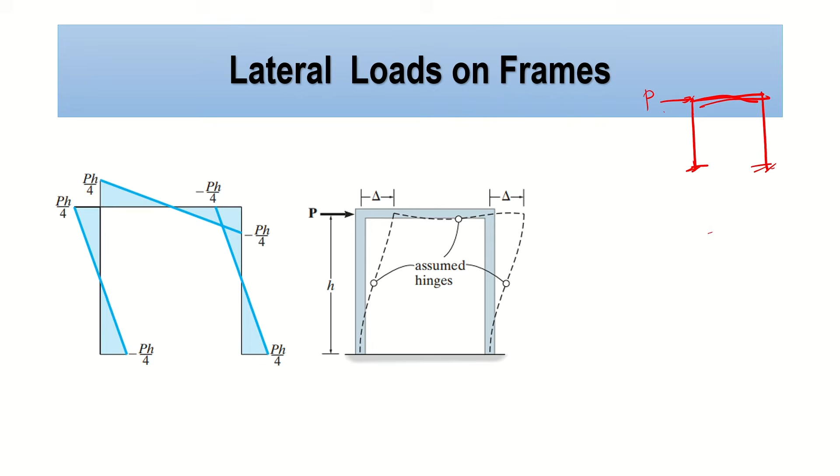So what do we do with that? This is an opportunity for us to create a modification in order to make this statically determinate. What we'll do is place internal hinges. When we place internal hinges, we all know that there is no moment occurring there. But we do have two forces, horizontal and vertical.

Now, because we have two forces, we can say that this is the appearance of my framing system. Now, at one joint, we still have four unknowns. So what are these four unknowns?

Let's say, for example, we consider this joint. Our four unknowns are 1, 2, 3, and 4. As you can see, this is still statically indeterminate because we can only provide 3 equations of equilibrium.

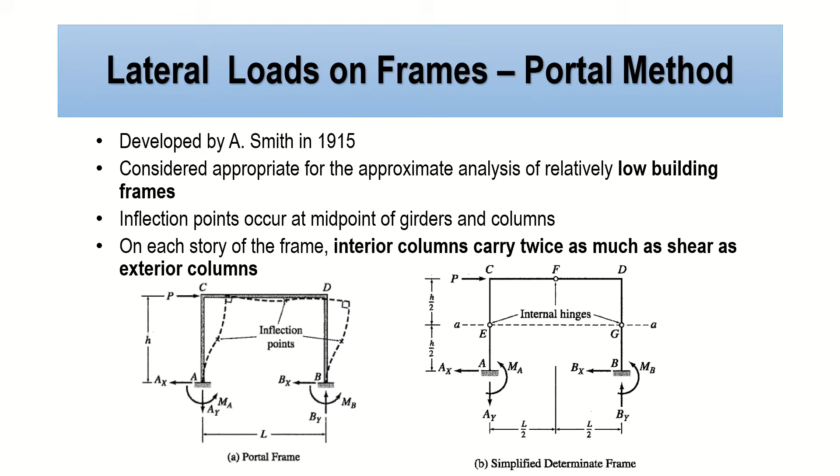To better understand concept number 4, I made an analysis here. So we have the portal method. Let's consider this framing system presented on your screen. As you can see, it looks like two portals.

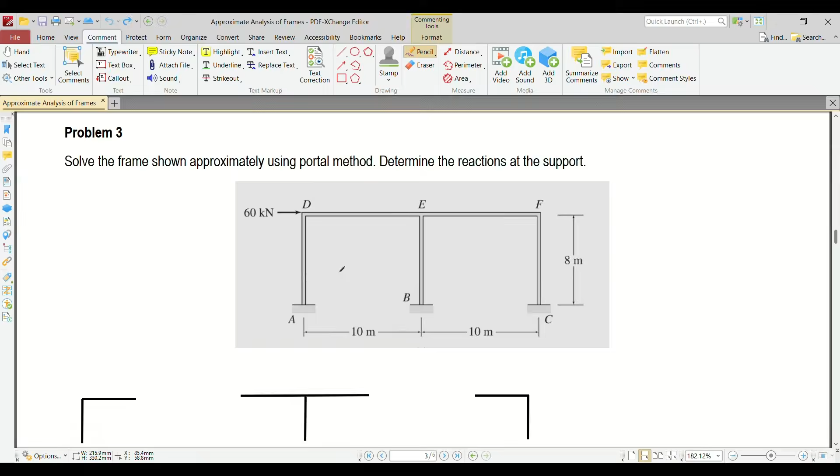As stated in the concept I presented earlier, at the center of each column and each girder we should provide internal hinges because that is a point of inflection. So now we'll place internal hinges here, here, here, here. To make it easier, it's good to label them - we finished at F, D, E, F, G, so this is G, H, I, then J, and then K.

Okay, so now the next step here is to get the value of the shear. Because, as we said earlier, based on the concept of approximate analysis due to horizontal loads - the portal method - the interior columns carry twice as much shear as the exterior column. So that's what we'll do. Let me draw the upper part first.

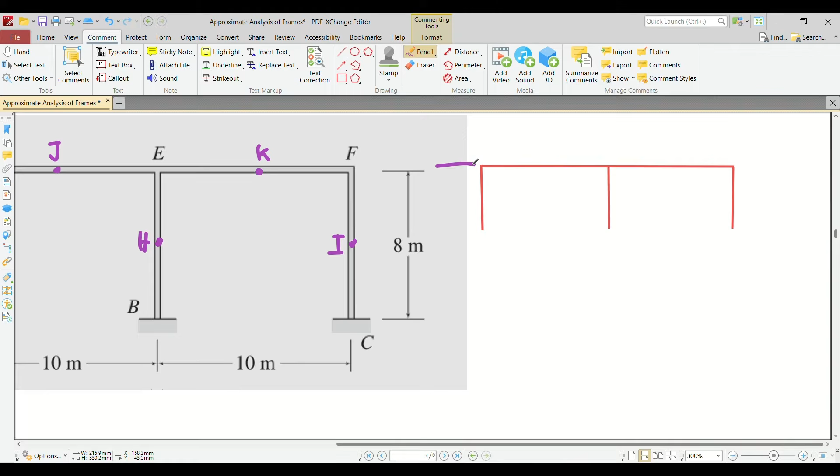So ito yung upper part class, no? So of course that is subjected to a loading. So ano yung loading natin? 60 kN. So ito pala ay 60 kN. So ngayon magkakaroon tayo dito, exterior V lang yan. Interior 2V. And then exterior again, this is V. In order to get the value of V, edi summation forces horizontal. So summation forces horizontal equal 0, papunta sa right, positive.

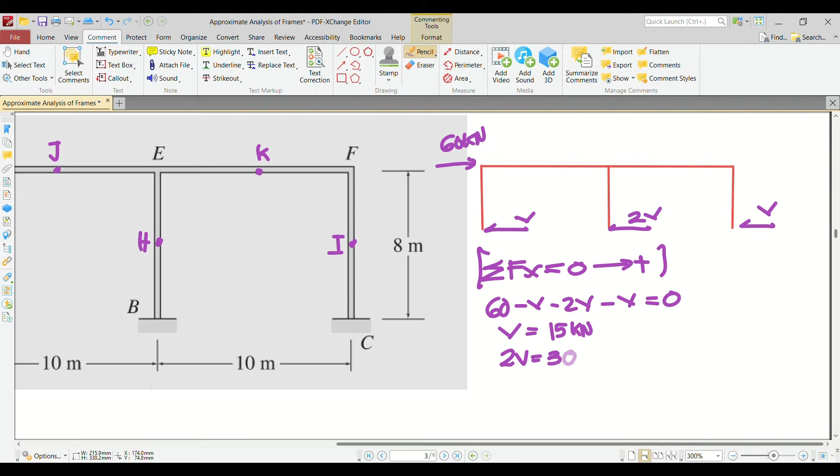So therefore, what will happen? So we have 60 positive papunta sa right minus V minus 2V minus V equals 0. So your V here is 60 divided by 4, so ang nakukuha ko ay 15 kN. So ngayon kung 15 yan, yung 2V natin is equivalent to 30 kN.

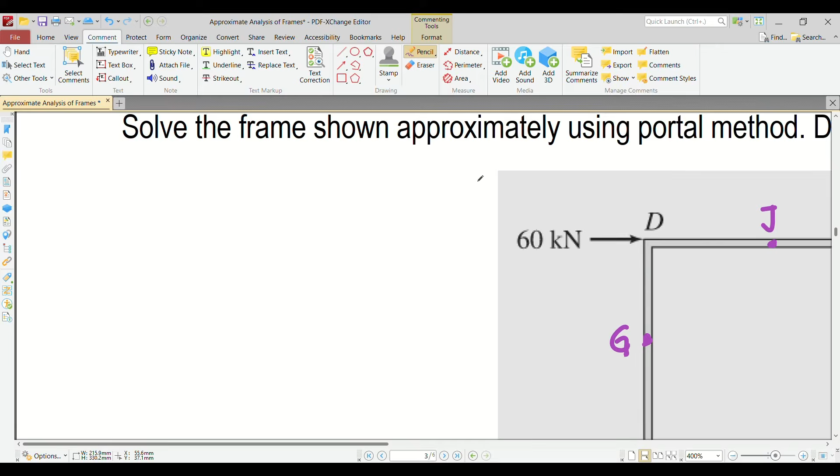Okay? So let's try to incorporate that here. Siguro lagyan na natin ng letter dito. Since pinapasolve sa atin yung framing system, lagyan natin to. So ito I think is G. GDJ. So this is G. This is D. And this is J. And then we have here the single shear na tinatawag nating V.

Or pwede na nating ilagay na 15 kN, no? Ayusin ko lang. Siguro ilagyan natin ng arrow. Ito na lang natin. Okay? So that is 15 kN. So don't forget you have here 60, no? So sige, lagyan din natin ng arrow dyan. Okay, so this is 60.

So ang gagawin natin, madali lang, no? Just remember that each joint should maintain equilibrium. So ibig sabihin, kapag nag-summation forces horizontal ako, vertical and moment dapat maging 0. So ngayon, ang gagawin natin, since hindi siya 0 pa, no? Kasi may 60 ka dito, may 15 ka dito, kulang ka pa ng 45. So ngayon, ano yung magpa-45 dyan? Remember, this is the hinge, no? Hinge din ito. Ito, hindi na ito makakapag-provide ng horizontal kasi meron ka ng 15. So magkakaroon ka ngayon ng

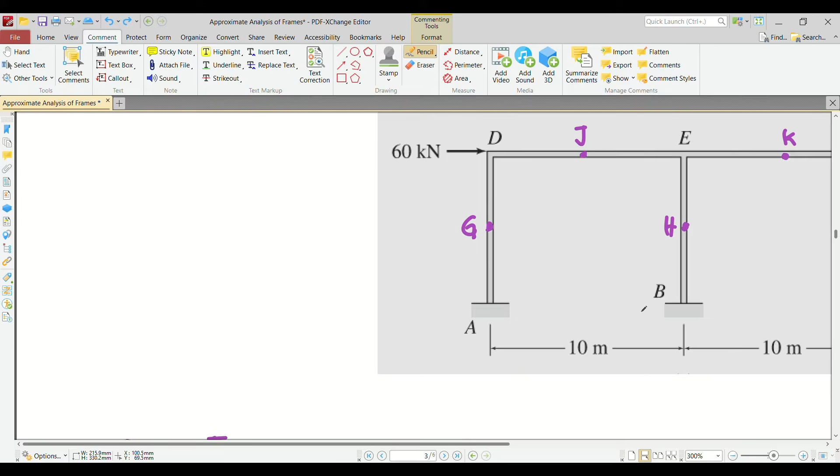Kasi wala kang horizontal. Again, like I said, each joint should maintain equilibrium, whether it is moment, or horizontal, or vertical summation. So ngayon, ang gagawin natin, gamitan natin ng moment. So dahil sa 15 kN, meron ka ngayong dito. By the way, what is this distance? Lagyan natin ng distance. So, ito ay, I think this is 8 meters. So 8 meters, kalahati ng 8 is 4, kalahati ng 10 is 5. So ito ay 4 meters.

This is, siguro lagyan natin ng block. This is 4 meters. This is 5 meters. So, ang gagawin natin, solvein natin yung mga moment niya. So, paano yun? Eto. Okay? So, 15, dahil dito sa 15, magkakaroon ka ng clockwise moment. Ngayon, anong value niyan? Eh, di 15 times 4. So, this is 60 kN meter.

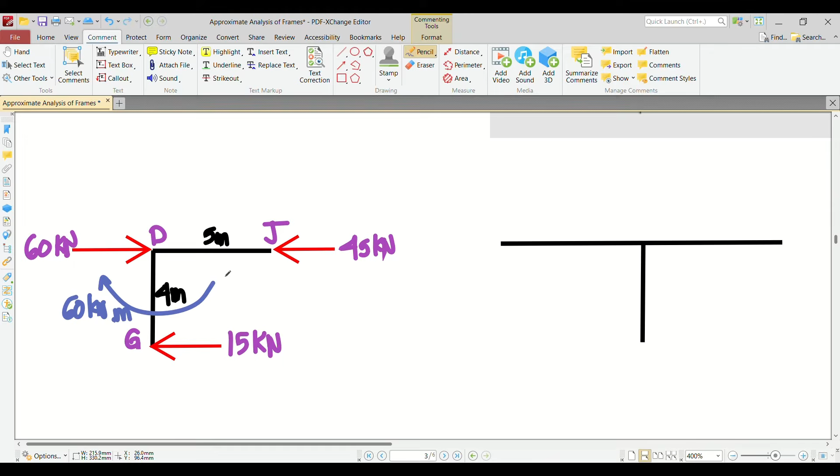So, of course, we need to counteract this moment. Paano? Eh, di pa ganito, pa-counterclockwise na moment. So, dapat yan din ay 60 kilonewton meter to maintain equilibrium.

So, ano mangyayari after that? So, of course, merong nag-i-induce dyan na 60. Hindi naman magkakaroon ng 60 dyan dahil lang dito. May nag-i-induce dyan. Ano? E di ito. Vertical force dito. So, ano yung vertical force dyan? So, that is just 60 divide 5. So, ilan yun? I think that is 12.5. 60 divide 5, that is 12. So, ilagay natin dito, 12.

Baguhin ko lang yung pen ko, ha. This is 12 kilonewton. And then, after that, we can now take summation forces horizontal. Kung meron kang pataas na 12 dito, malamang ito ay pababa, na 12 din, of course. To maintain equilibrium. Okay? Ito rin ay 12 kilonewton.

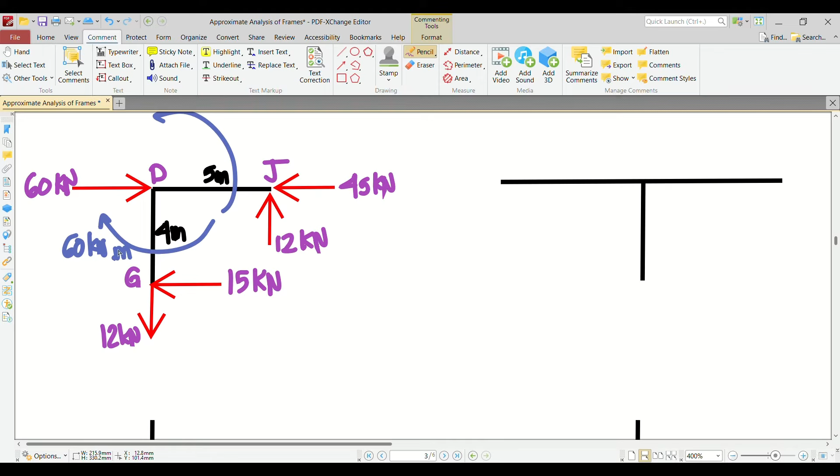Hopefully, nakasunod, ha. Again, itong 60 ay galing lang sa 15 times 4, nag-moment ka dito sa D. 15 times 4, 60. Ito, mas counteract para maging equilibrium. So, dapat may counterclockwise ka na 60. May nag-i-induce dito, which is yung 12. 12 times 5 is equals to 60. So, tapos na natin tong joint na to.

Okay? So, ngayon, punta tayo sa next joint. So, lahat ng forces dito, for example, ito, papunta sa left, tapos papunta sa taas, magbabaliktad yan kapag tinransfer mo. Okay? So, ito, papunta na sa right, and then, papunta na downward yung force, vertical force. Okay? So, ito ay 45 din. Tapos, ito ay 12 kilonewton din. Same lang naman yan, internal hinges yan.

Okay? So, siguro lagyan natin ng horizontal, ng distances. So, ito ay 5 meters. This is also 5 meters. And this one is 4 meters. So, this is J.

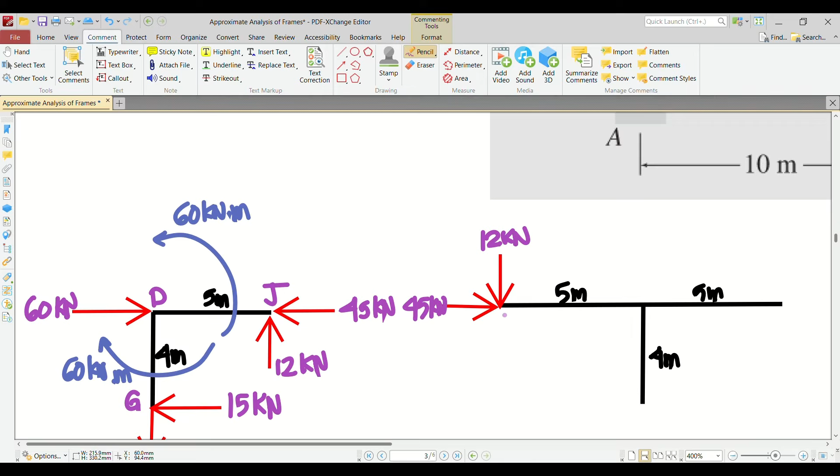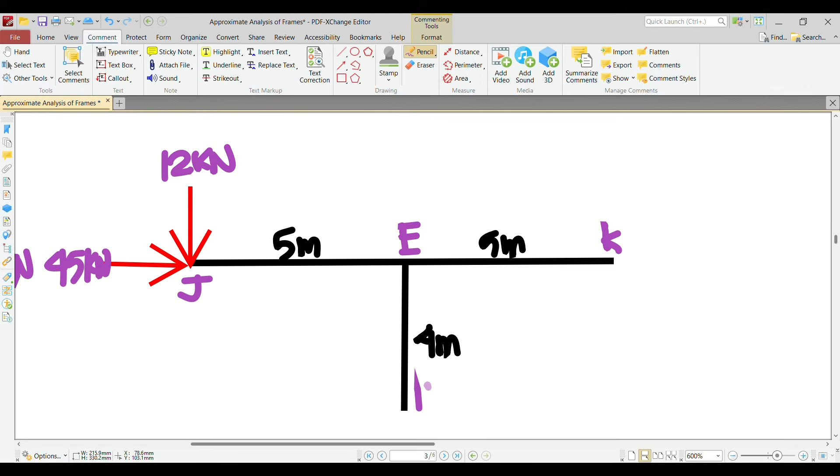J, and then ano pang letter yan? E, K, H. Okay? So ngayon, anong next step na gagawin natin?

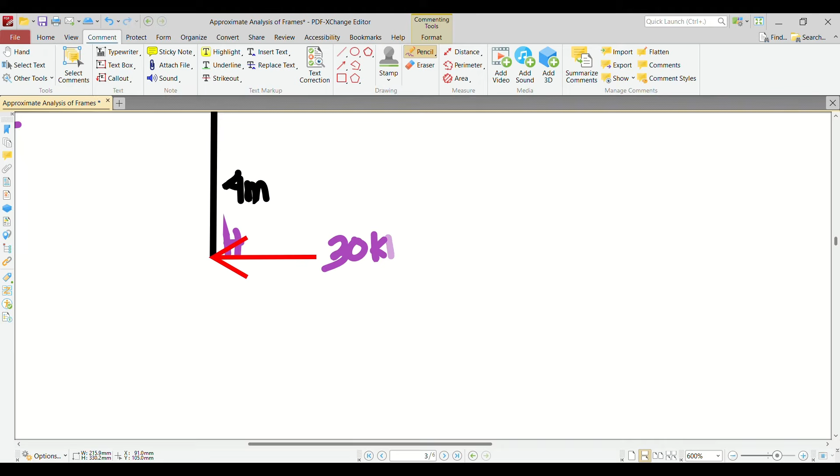Remember that we do have here a shear, 2V, di ba? May 2V tayo dito. E di ilagay natin, ano ba yung 2V natin? Kung ang V natin ay 15, ang 2V natin ay 30. So ito ay 30 kilonewton.

Okay? So of course, we do have here, kung 45 to, ito 30. So to maintain equilibrium, kailangan may pupunta pa ako sa left side na ilan? So that is 45 minus 30. So probably this is 15.

So 12 times 5, that is 60 kilonewton meter. Aside from that, may moment din tayo dito, ini-induce na 30. So pag ganito, anong value niyan? That is 30 times 4. So 30 times 4 is equals to 120 kilonewton meter.

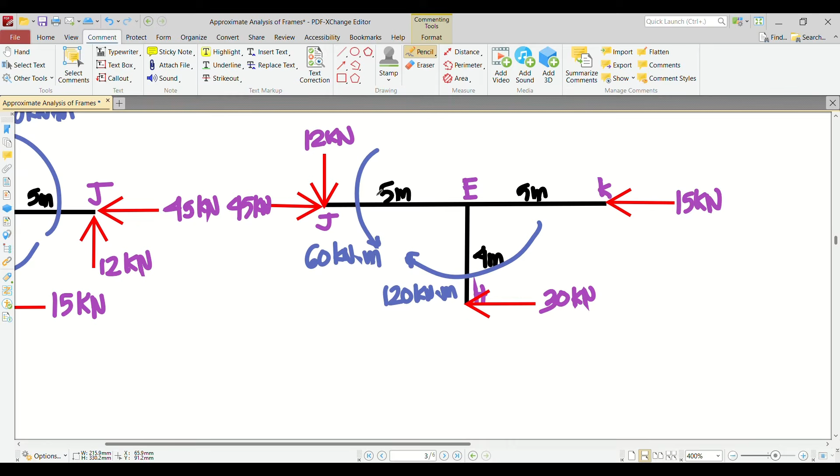Okay? So paano makuha yung value niyan? That is just equal to 60 divide 5. So that is just equal to 12 kilonewton. Yan, kilonewton lang, 12 kilonewton.

So ngayon, meron kang 12 dito na downward, meron kang 12 na upward. So yung value ng vertical component dito ay 0. Okay? Kasi 12 minus 12 is equal to 0. Equilibrium na yon.

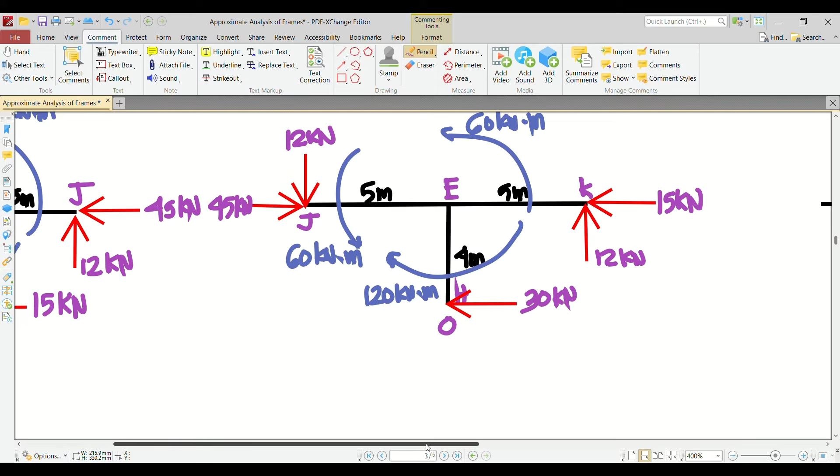Okay? So we're now finished with this joint kasi meron na tayong horizontal tsaka vertical ng each letter. So proceed tayo dun sa right side. Okay? So ngayon, next step here is i-transfer yung loading. So ito magiging papunta na sa left, sa right. Ito magiging downward.

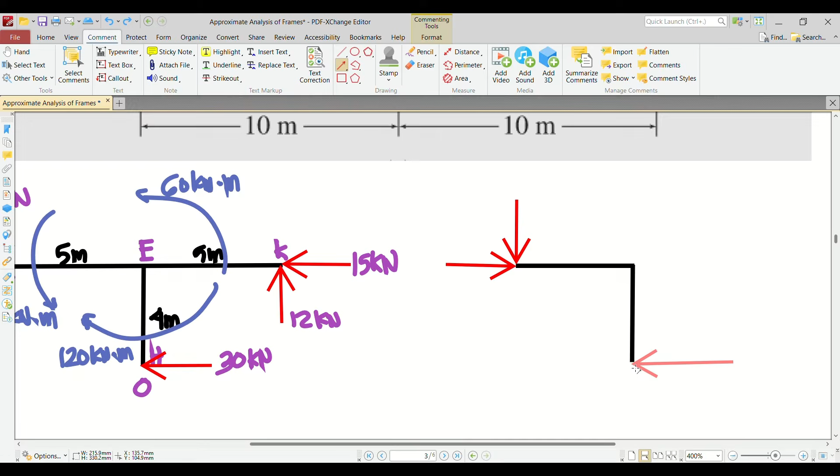Okay? So of course, we do have here the 15. So kung downward to, wala na namang iba yan. So probably this is upward, no? Okay, lagyan na natin. So this is 15 kilonewton and this is based on the shear.

So remember yung shear natin, no? Galing yan dito. So V, that is also 15. So paano mo malalaman kung tama ka? So dapat yung shear mo dito na makukuha mo is equal to dito. Para pag nag-summation forces horizontal ka, equal to 0. O, probably tama tayo, no?

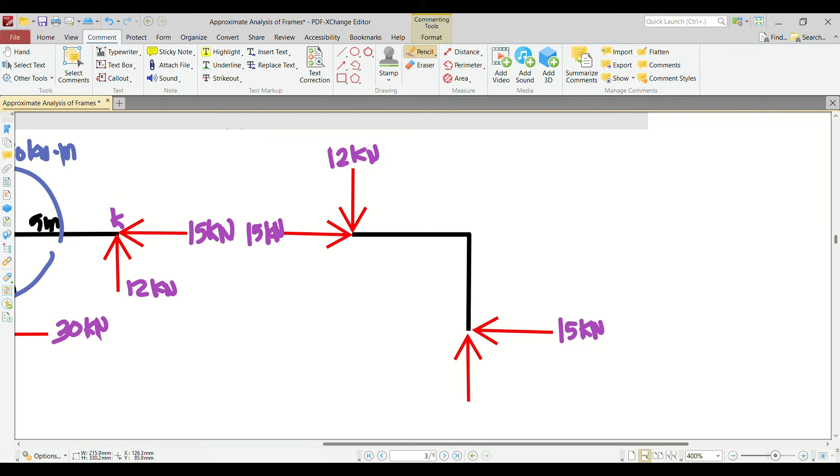Ito ay 12 kilonewton. So para ma-maintain yung equilibrium, so malamang ito ay 12 kilonewton din. Okay? So we can incorporate the moments. So we have here 60 kilonewton. So by the way, let's incorporate the distances para di magkalituhan.

Ito ay 5 meters, ito ay 4 meters. Okay? So again, 15 times 4, that is 60. So meron ka ulit ditong 60 kilonewton meter. So as you can see, this joint, equal yan, maintain equilibrium. So therefore, we are probably correct.

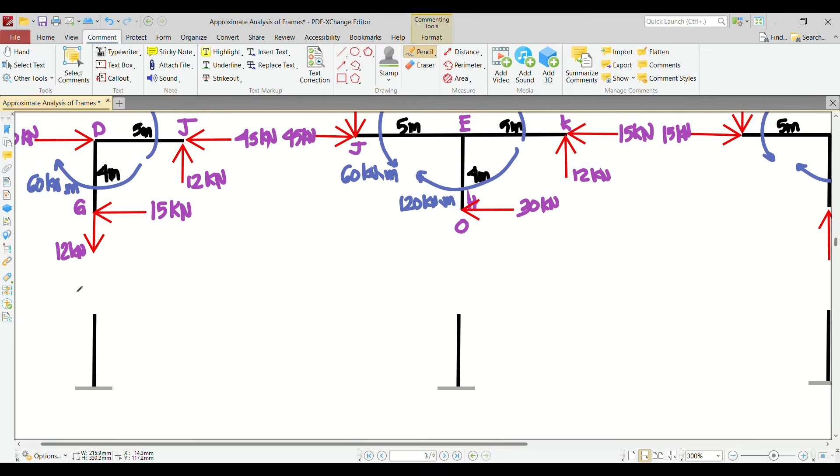So after that, since we are getting the reaction at the support, we can now transfer the loading at the support. So of course, magpapaliktad ng direction yan. Kung pataas yan dito, kung pababa yan sa taas, pataas yan dito. Okay? Tapos, papunta sa left. So this is point A.

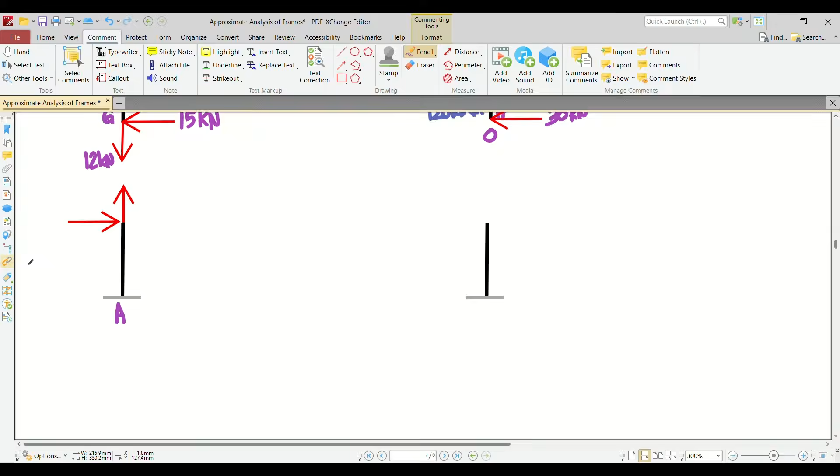Tama ba? A, B, C. Okay? So ito ay 12 kilonewton. This is 15 kilonewton. So of course, we do have moment in that. No? So ito, by the way, this distance is 4 meters. So moment tayo dito. This is 15 times 4, so that is 60.

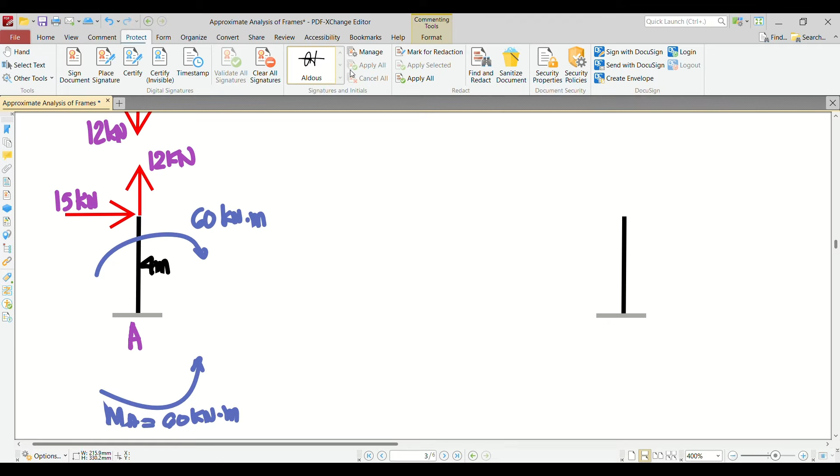And then we must resist that moment, no? To maintain equilibrium at joint A. So ngayon, meron kang MA, 60 kilonewton meter. So yan na yung reaction mo, no? Pero siguro unahin natin yung vertical and horizontal para di magulo. Burahin ko muna ito.

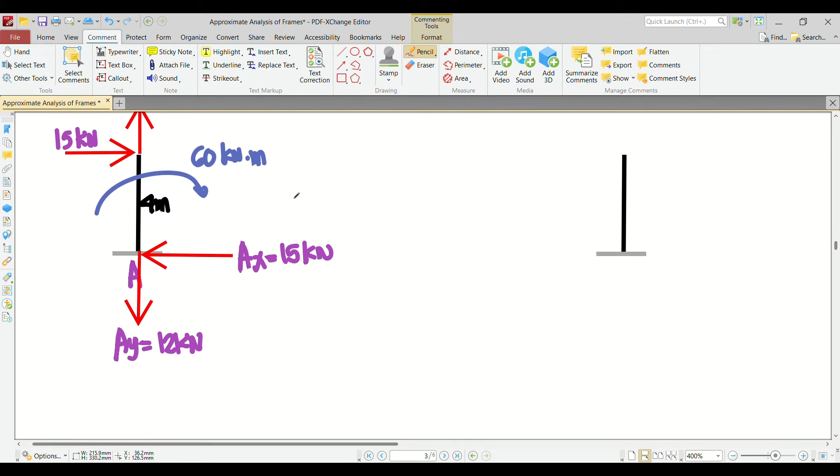So ito yung vertical reaction. AY is 12. AX is 15. Dire-resist ko lang to, no? Baliktad lang yung direction. And then we have the moment, which is 60. That is our answer for letter A.

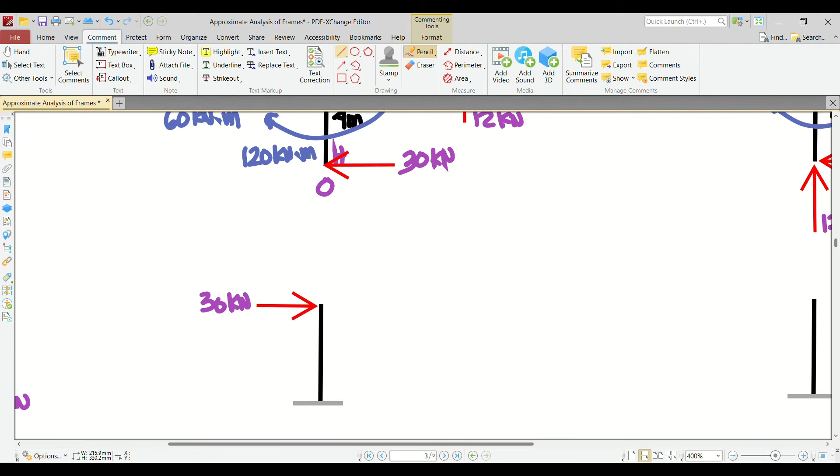So ngayon, for letter B, wala tayong vertical kasi 0. So horizontal lang. So ang value niyan is 30 kilonewton. So this is 4 meters. This is point B. BX is 30 kilonewton. BY, sorry, is equals to 0.

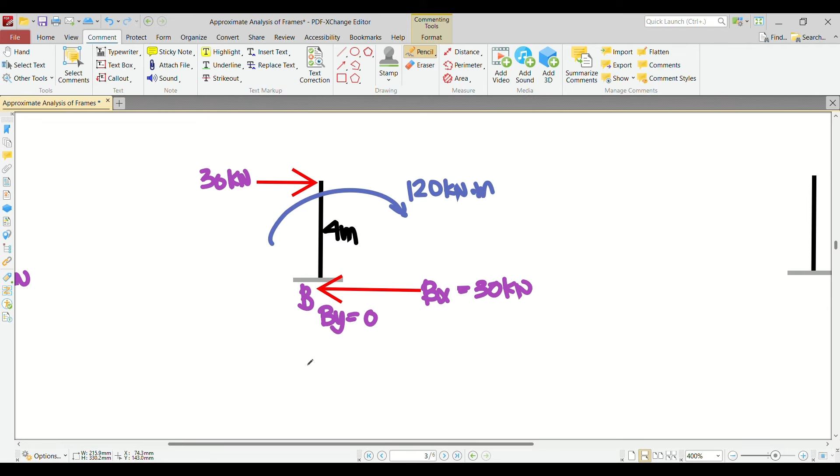And then let's incorporate the moments. So we have here 4 times 30, that's 120. So the moment reaction here, MB, should be equivalent also to 120 kilonewton meter. So that is your answer for reaction at point B. So punta naman tayo sa C.

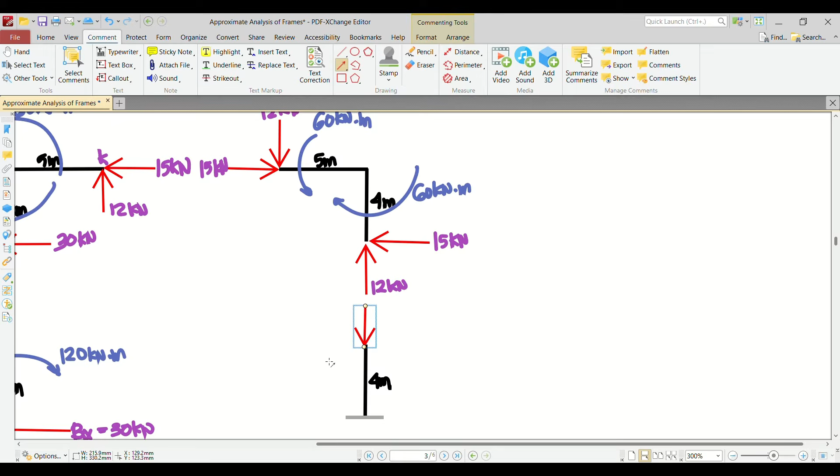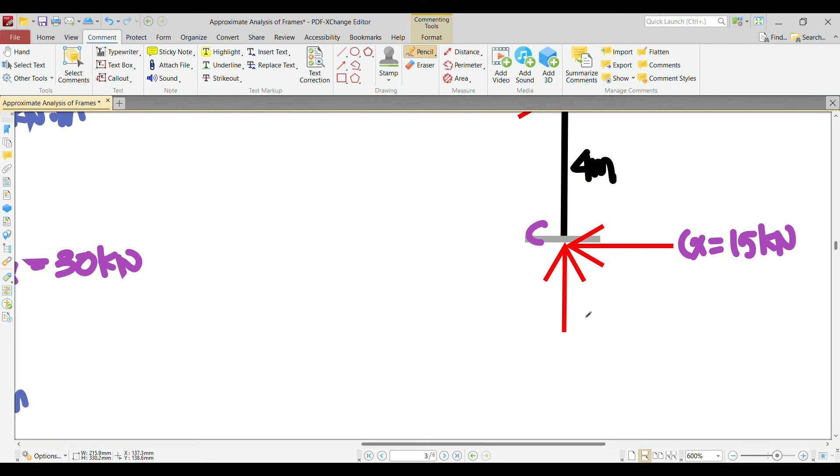Okay, so this is 12 kilonewton, and this is 15 kilonewton, galing lang yan sa taas. Ito, kinopya ko lang, so ito ay point C. So yung Cx natin is equivalent to 15 kilonewton also, and yung Cy natin is equivalent to 12 kilonewton. And then yung moment sa C is 15 times 4, so that is 60.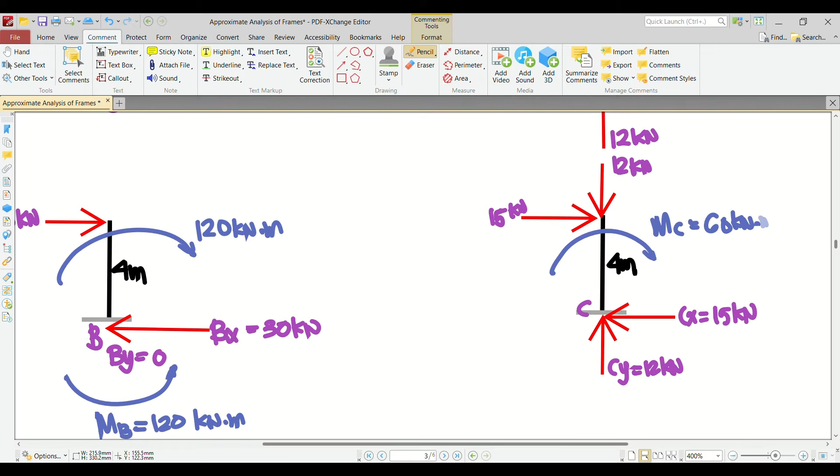And then we have MC here. Ay, hindi pala yan MC, moment lang pala yan, okay? Itong MC, 60 kilonewton meter. Okay, so that's how we solve problem number 3.

So ganun lang, maintain equilibrium, just remember this concept, no? Once you get the value of V, tuloy-tuloy na yan. Simula ka sa kanto, papunta sa kanan, or pwede rin pababa, it's up to you, no? But for this one, the answer here is at the bottom part, yung reaction ng support.

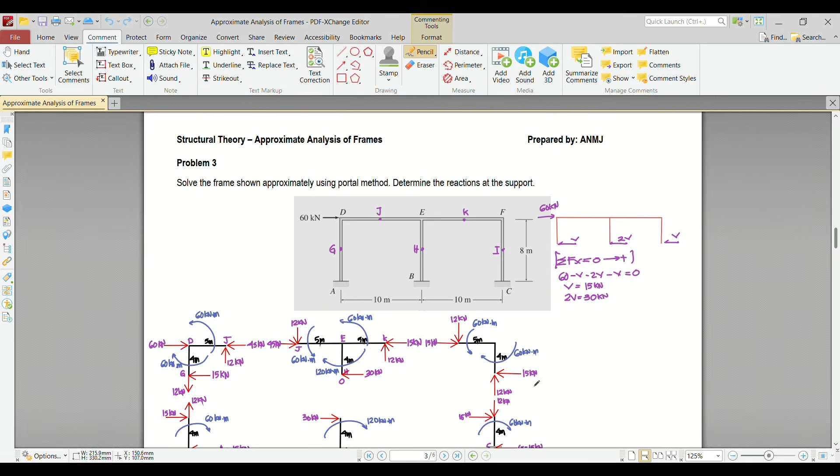Okay, so we have another problem. What if we have dalawang palapag? So stay tuned for that, okay?

Okay, so let's try to solve another problem with regards to portal method. So this is problem number 4. It says here that we need to solve the frame shown approximately using portal method, and we need to determine the following: shear at column EB, axial force at column FC, and then moment at support A.

But first, let's define what is shear and axial force. So ngayon, kunyari, meron tayong member, ito yung member natin, no? When we say shear force, the force that we're talking about is the force perpendicular to the member. So ibig sabihin yung force is, it's either papunta dyan or papunta dito, perpendicular to the member. So ito ay shear force, shear force.

So when we say axial force naman, yung force na pinag-uusapan natin is parallel to the member. Okay, so ayan na, malinaw yan na. Again, shear is perpendicular to the member, axial force is parallel to the member. So when we say moment at the support, ibig sabihin yung moment dito sa support and moment at the joint, it depends, no? Moment sa GH, moment sa GD, but usually in rotation fashion, no? We already did that on our previous example.

Ito, no? Pag hinahanapan kayo ng mga moment, ayan, moment at DE. So ito yon 60 kilonewton meter. Okay, so let's try to solve this one.

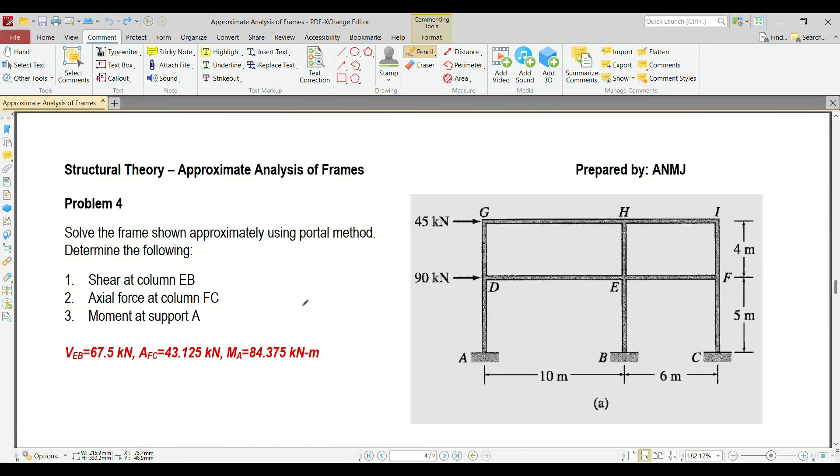So actually, may madaling way ng pag-solve dito. So medyo isang tingin mo lang or isang konting calculation lang, masolve mo na agad yung shear at EB. And then konting tingin pa, makukuha mo na agad si column FC. And then sa moment support at support A, medyo madali lang din to. So ito medyo madali, ito medyo madali, ito kailangan ng konting analyzation. But for this example, we're going to solve every forces present in this framing system.

Kasi in the problem, hindi lang naman yung ito yung pwedeng itanong eh. Pwedeng itanong ay shear force sa GH, ito, shear force sa GH. Pwede rin naman axial force sa GH. Pwede rin naman shear force sa HI, axial force sa HI, moment sa HI. So marami siyang pwedeng itanong, no? So kailangan natin ma-understand paano pag yun ay hinahanap.

So hindi pwedeng shortcut, di ba? Paano pag yun ay hinahanap? Paano gagawin natin? Paano natin siya i-solve? Kaya, isa-solve natin lahat ng member forces present in this structure.

Okay, so paano yun? Una muna, so again, just like what we did on our previous example, ang sabi natin, each and every one of the member columns, tsaka member girder, should contain internal hinges. So ibig sabihin, ito ay may internal hinges. Again, this is based on point of inflection. Ayan, meron tayong internal hinges.

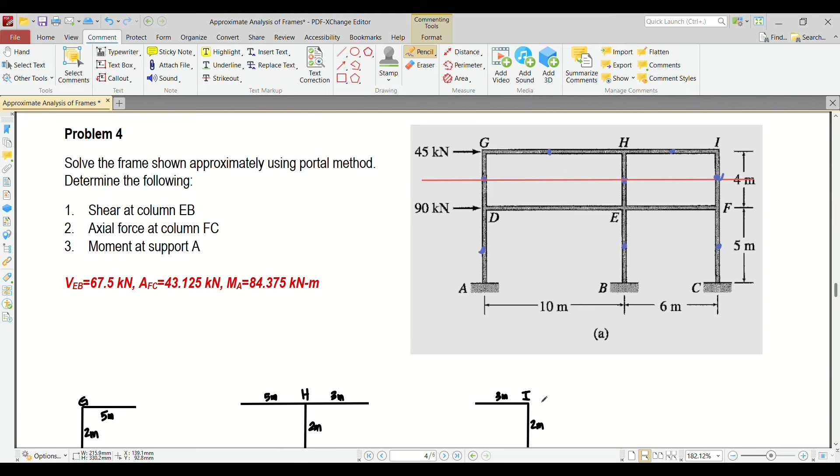Aside from that, we need to cut, no, the upper part. O, ikakat natin, once we cut that, consider the upper part of the framing system. So pag kinonsider natin yung upper part, dito na lang sa kanan, no? Ito makikita natin.

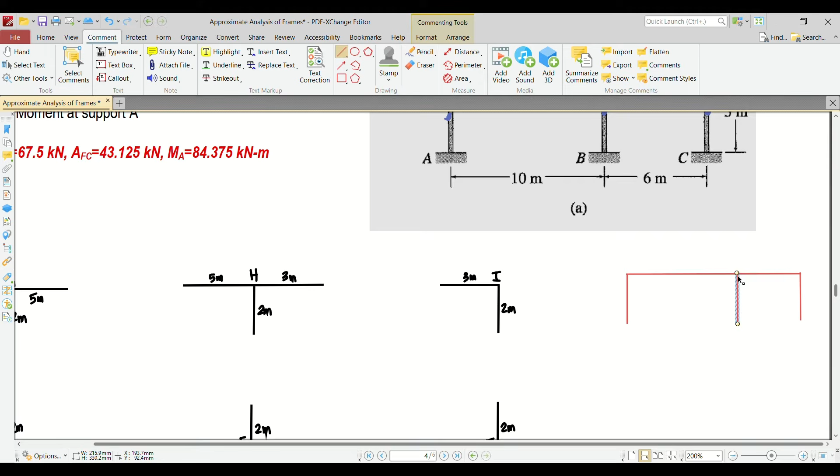Remember, if we're doing portal method, tapos multiple layers, or multiple story, always start in the upper part, especially if you're going to solve every member, no? Kasi wala kang masosolve kapag nag-start ka sa bottom. Okay, so ayan yun. So pag upper part consider natin, ang kalahati nito 2 meters lang, right? Tapos, meron kang 45, so ilagay natin yung 45 dito.

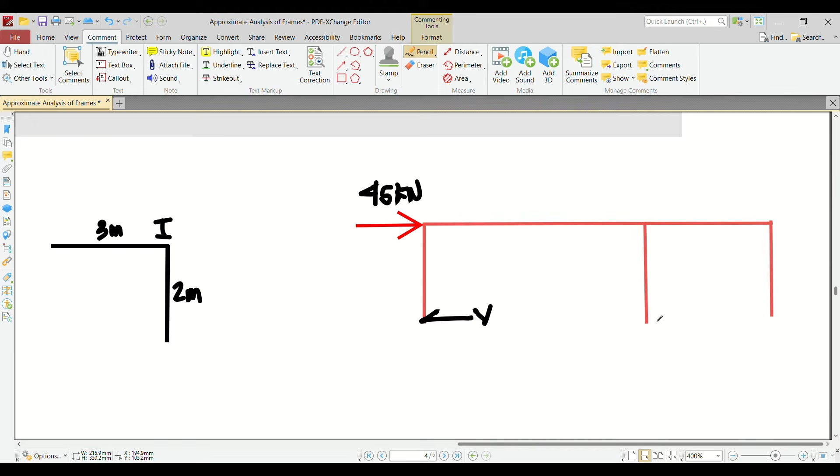This is 45 kilonewton. Sa exterior, isang shear. Sa interior, dalawang shear. And then another exterior, isang shear. Again, the distance here is 2 meters, 2 meters, 2 meters. Thus, this one is 5 meters or 10 meters, I think. And then this one is 6 meters. So tignan natin, kalahati lang yan.

How do we solve the value for V? Summation of forces horizontal equals 0, papunta sa right positive. So we have 45 papunta sa right, that's positive. Minus V, minus 2V, minus V. Equate natin yan sa 0. So basically, yung 45, divide mo lang ng 4. 45 divide 4, so that's 11.25.

So meron tayong 11.25 kilonewton na shear. O, how about 2V? 2V times 2 mo lang yan, times 2. So that is equivalent to 22.5 kilonewton.

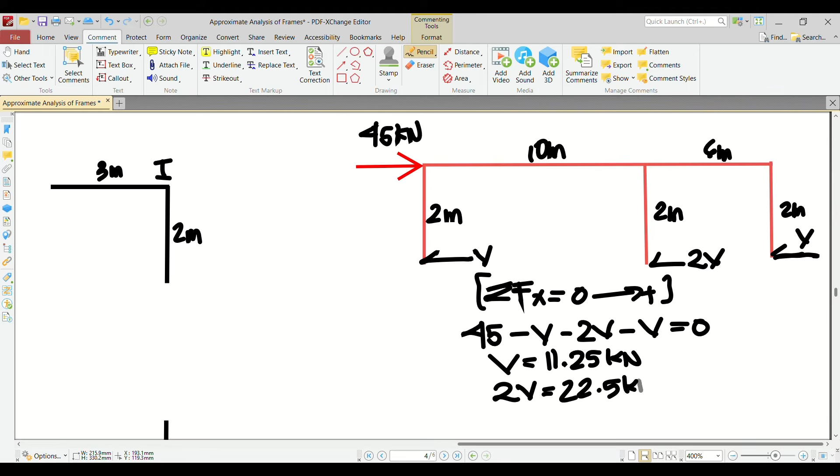Okay, so now that we're finished in that, pwede na tayo mag-proceed dito sa ating framing system. I already cut the framing system again sa gitna ng internal hinges. Kinat ko dito, kinat ko dito, kinat ko dito, kinat ko dito, kinat ko dito. Kaya ganito yung nakita nyo itsura.

Don't forget that we do have 45 here, baka makalimutan nyo, mamamali yung analysis nyo. So this one is 45. Aside from that, syempre meron tayong shear dito, no? Yung recently lang na-solve natin, so ilan yun? 11.25. So let's write that here. This one is 11.25 kilonewton. Like I said, this whole joint should maintain equilibrium.

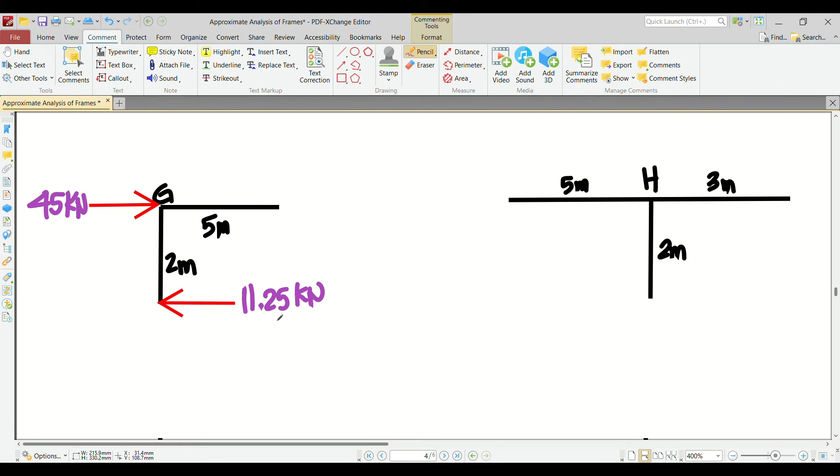Kung 45 ka dito, minusan mo ng 11.25 para makuha natin yung papunta sa left side dito, para mag-0, para maging equilibrium. So ilan kaya yan? 45 minus 11.25, so that is 33.75. So this one is, lagay ko lang sa taas.

After this, wala na tayong masosolve kasi wala tayong vertical force, but we can incorporate moment. Paano yung moment? This force will induce clockwise moment at joint G. Paano gagawin natin dyan? I-drawing natin, so ito yon. Ngayon anong value niyan? Di ba yung moment, force times distance? This is the force, this is the perpendicular distance. So that is 11.25 times 2, so that is 22.5. So we write here 22.5 kilonewton meter.

So ayusin ko lang. 22.5 kilonewton meter. Again, we need to counteract this moment. Kailangan natin magkaroon ng counterclockwise dito. That is just equivalent to, kung meron kang 22.5 dito, dapat meron ka ding 22.5 dito para maging equilibrium, para pag summation moment mo, equal to 0. Pero may nag-induce dyan sa 22.5 na yan, ano yun? Ito yun, yung vertical force present in this joint. Paano yan? Di 22.5 divided by 5 lang, para 5 times this value is equivalent to 22.5. So this one is 22.5 divided by 5, so that is 4.5. So this one is 4.5.

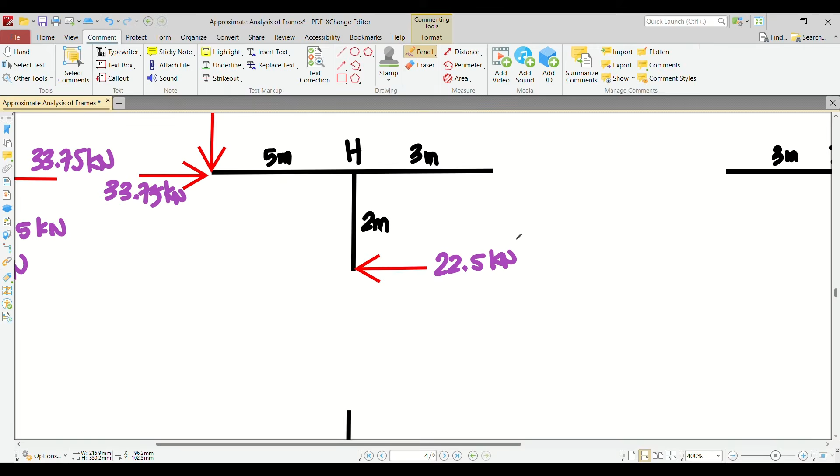So meron kang 33.75, so kulang yung 22.5. So 33.75 minus 22.5, so kailangan mong magdagdag ng 11.25 na papunta sa left, to maintain equilibrium again. This is 11.25.

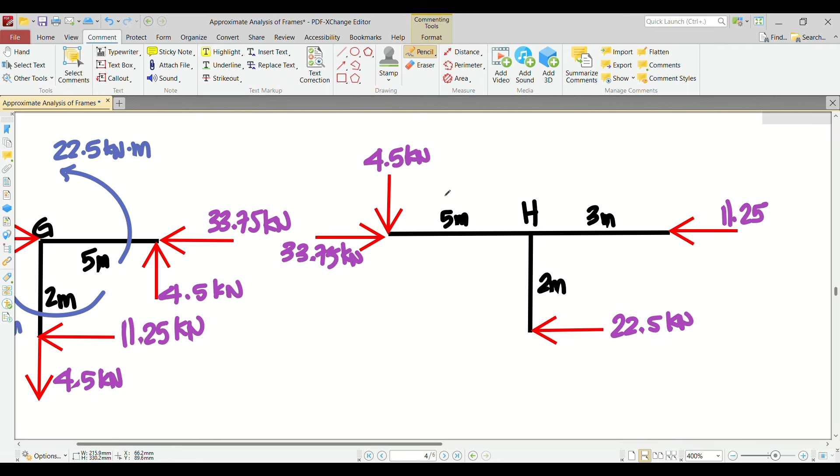Okay, so wala ka nang masosolve kasi meron kang dalawang unknown na vertical force. So ngayon anong gagawin mo? Let's incorporate the moment, no? Pwede mong kopyahin yung moment sa left side. Kung meron kang 22.5 dito, meron ka rin malamang na 22.5 na pag ganun, same lang naman yan, 4.5 times 5. So meron ka ditong 22.5 kilonewton meter. So again meron kang 22.5 times 2, that is around 45. So meron kang clockwise na 45.

So hindi sapat yung 22.5 para sa 45, so kailangan nating dagdagan yung counterclockwise. So ito is malamang 22.5 din, para pag pinag-add mo, equal lang siya sa 45. Pero may nag-i-induce dyan, sino yung nag-i-induce dyan? The vertical force present here. So para mag-move siya ng counterclockwise, that should be upward, no? Hopefully nakakasunod. So what is the value of that? Basically, the value of that is just equivalent to 22.5 divided by 3, so that is 7.5 kilonewton.

Ngayon, meron tayong 4.5 na pababa, tas may 7.5 na pataas, kulang yung pababa. So kailangan natin maglagay dito ng pababa.

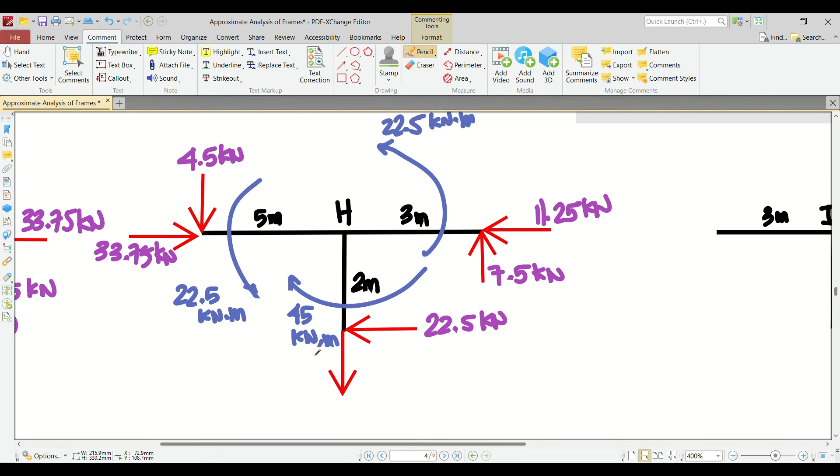Wait, let me fix this. Okay, what is the value for that? So 7.5 minus 4.5, so that is 3. So this one is 3 kilonewton.

Okay, so we already completed this joint once we get the value for the vertical and horizontal component of our reactions, as well as the moment. So we shall proceed to the next portion. So here it is, this is the next portion.

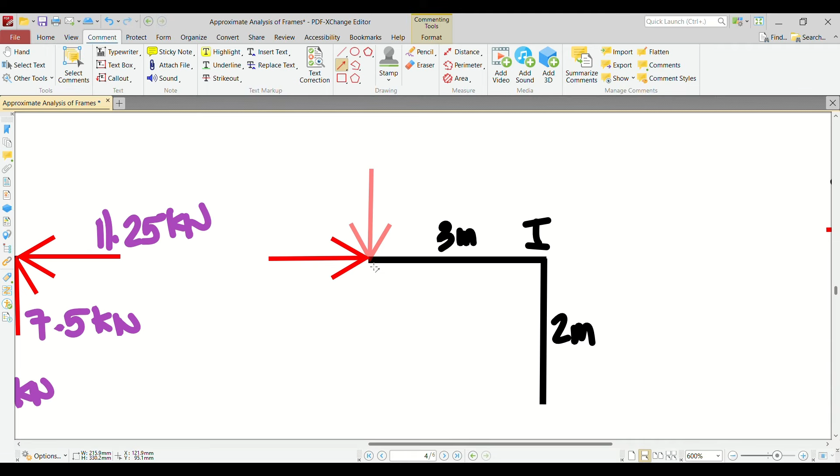So again, the forces and direction at the other joint will reverse, because we already transferred. Remember, this is a hinge. So this one, what's the value? 7.5 kilonewton, and then this one is 11.25 kilonewton. And don't forget, we have a shear there, single shear.

This is our V, the V we computed earlier. So our V there is around 11.25 kilonewton as well. So now, when we take moments, we can actually already solve the vertical component at this point, right?

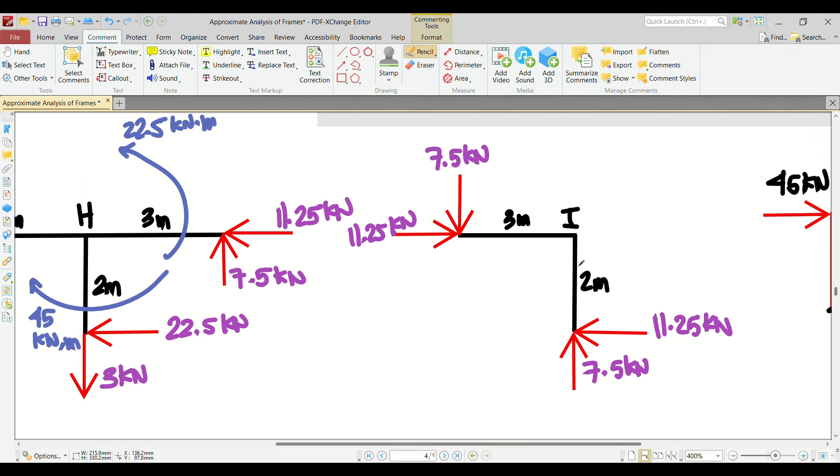So 7.5. But we'll know we're correct when we take the moment and the answer that comes out matches. Okay, so this is 7.5 kilonewton. So what happens? Let's try to take the moment. So what happens? 7.5 times 3. So that is 22.5.

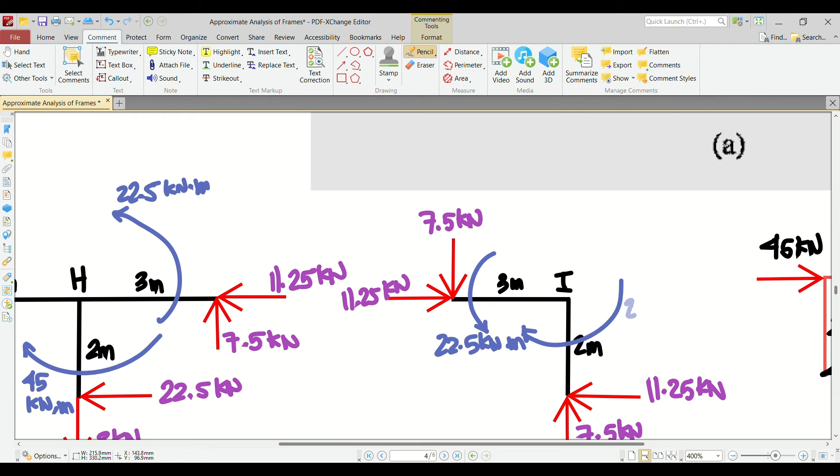So this is 22.5 kilonewton meter. And then this one is 11.25 times 2, so we all know that equals 22.5. So we are probably correct. We're still correct.

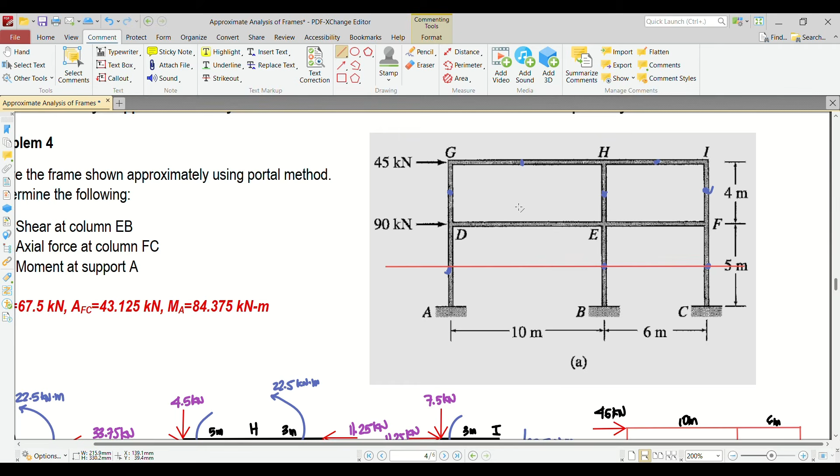Okay, so what's next? Next is we shall proceed to the bottom part. But before we proceed to the bottom part, we need to solve here again, we'll cut here. So when we cut there, we can now eliminate this cutting plane, then we'll include the 90 in the loading. Let me draw that first.

Okay, so don't forget we have here 45 and 90. Let's write here, we have 45 kilonewton and then we have 90 kilonewton. Double check if that's correct. So it's correct. And then the distance here, I think this is 4 meters, right?

4 meters, 4 meters, and then we have here also 4 meters. Then this, since 2.5 is half of that, so that must be 5 meters, 5 meters, and then this one is also 5 meters. This one is 10 meters, this one is 6 meters.

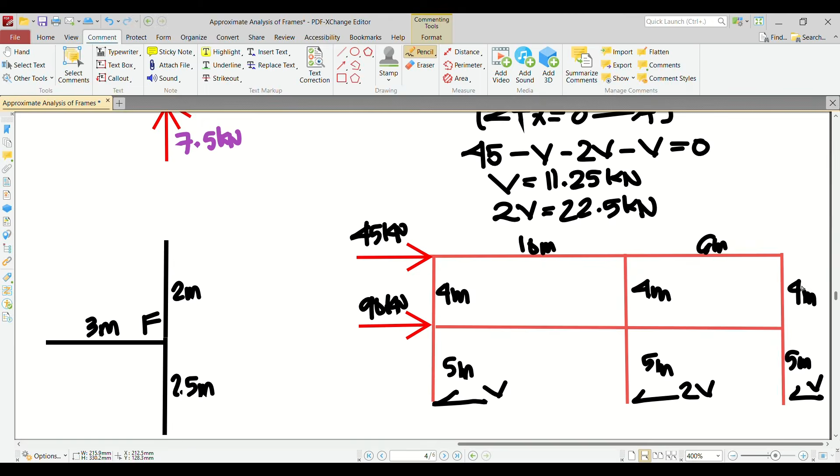Okay, so still the same, exterior column should contain single shear, interior column double, exterior single. Again, this one is different from this one. But still the same, summation of forces horizontal still applies. So, summation of forces horizontal equals 0, going to the right is positive. So this one is equivalent to 45 plus 90 minus V minus 2V minus V equals 0.

So we can now determine what's the value for V. Let me fix this. So V is equivalent to 45 plus 90 divided by 4, giving 33.75 kilonewton. So how about 2V? We multiply that by 2, so that is 67.5.

Okay, so let's try to solve the bottom part. So here's the bottom part. So all of the force directions in this joint will be reversed. But don't forget, we do have 90 here, so we might forget and get the wrong answer.

So we have there 90 kilonewton. Okay, then let's place this going downward. So now, going upward. And then this one is towards the left. Then don't forget, we have a shear here too.

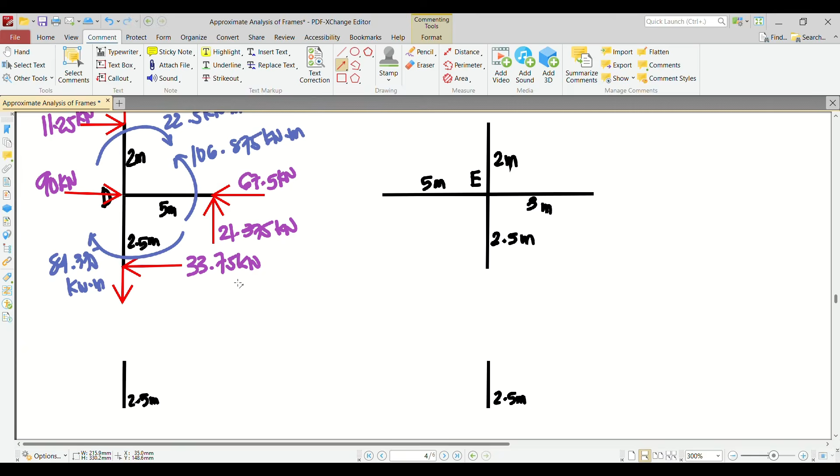Okay, so after that, since we already got the value, pareha silang pataas, so mag-add lang yan. Siyempre kailangan natin counterin yan to maintain equilibrium. So dapat meron tayong pababa dito. So that is 21.375 plus 4.5, that is 25.875 kilonewton.

Okay, okay. So now we can now proceed to the middle part kasi tapos na tayo dito. Meron na tayong vertical and horizontal as well as the moment. Again, just like what we did previously, change ng direction.

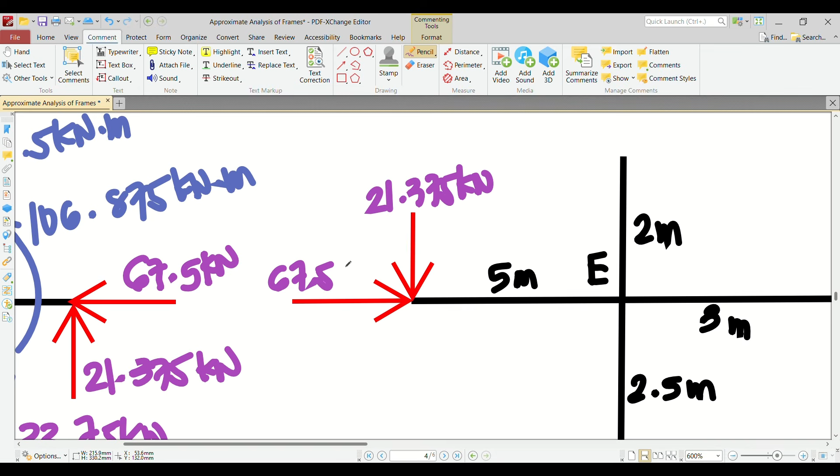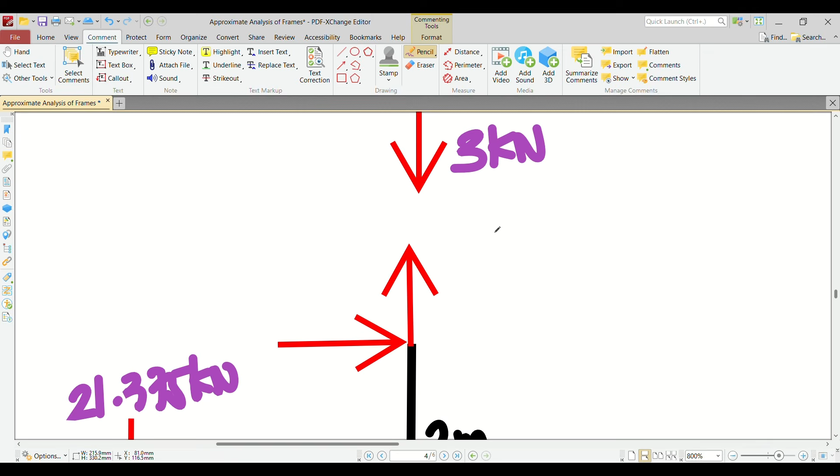But same forces. Okay, so this is 21.375 kilonewton. This is 67.5 kilonewton. And then we also have here yung nasa taas. So pababa, pataas na ngayon. Papunta sa left, papunta sa right. Okay, so the value of this is 3 kilonewton.

Tapos yung sa kabila, 22.5. Okay, so don't forget, we do have here the 2V, yung nasa babang 2V. So I think this is 67.5. Ayun, 67.5.

So we can now proceed. So para maging equilibrium ito, 22.5 plus 67.5, mag-a-add yan, di ba? So meron kang kumukontra na 67.5, so may natirang 22.5 dito. So this one is 22.5. Para ma-maintain natin yung equilibrium, ayan, magsi-zero yan. And then after that, proceed in getting the moment.

So magmo-moment tayo. Unahin na natin to, pwede naman natin kopyahin. So the value of that is 106.875. And then pwede na natin kopyahin yung nasa taas. So the value of that is 45 kilonewton meter. Then ito, 67.5, this is just equal to 67.5 times 2.5. So that is 168.75.

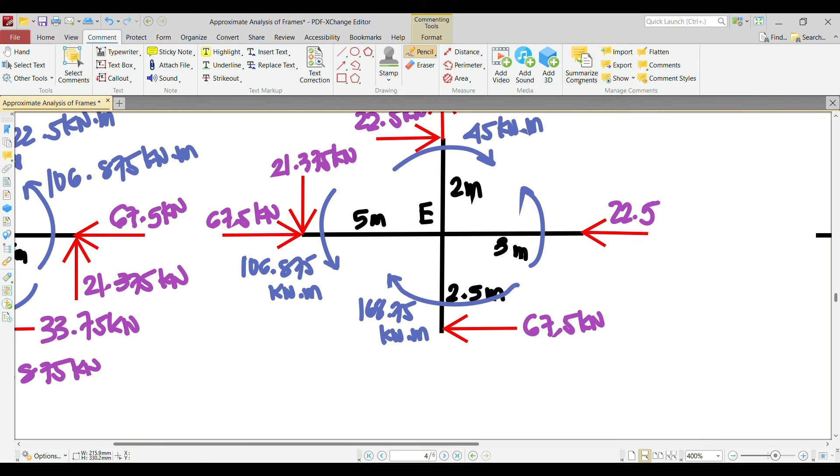So ang mangyayari, mag-a-add si 45 tsaka si 168.75, ma-minusan natin ngayon ng 106.875. So yun yung kulang na counterclockwise moment dito. Okay, so ang mangyayari, 168.75 plus 45 minus 106.875, ang nakukuha ko, 106.875 din. Okay, and then may nag-i-induce dyan, which is ito. So that is just equivalent to 106.875 divided 3, so that is 35.625.

This is 35.625 kilonewton. So meron tayong pababa na 21.375. Pero meron tayong dalawang pataas, 35.625 tsaka 3. So mag-a-add yan, 35.625 plus 3, and then ma-minusan natin ito para makapag-induce tayo ng pababang force dito. Okay, to maintain equilibrium, again equilibrium concept lang ang pinag-uusapan natin dito. So ang nakukuha ko is 17.25.

So we have here 17. One moment.

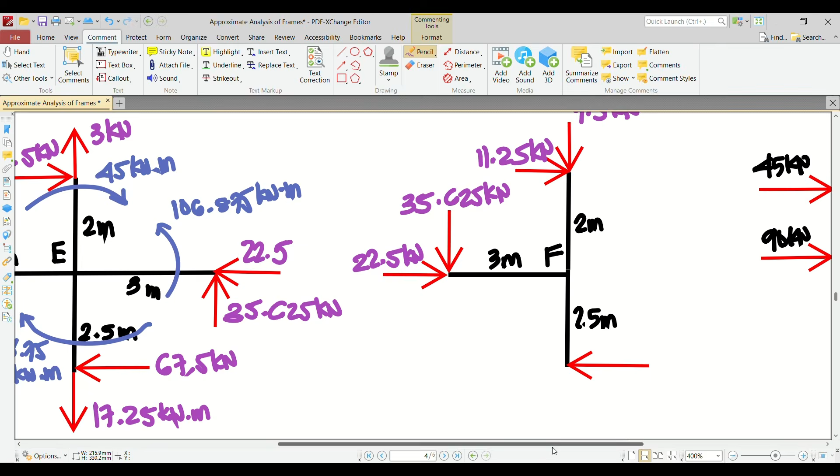So again, meron tayo ditong 33.75. So para ma-check natin kung tama tayo, so dapat pag pinag-add natin yung dalawang horizontal na nakuha natin, which is 22.5 tsaka 11.25, dapat equivalent siya sa 33.75. So mukha naman, no? So tama, equivalent. So most probably, we are correct.

And then after that, we can now proceed in moment checking. So sa moment checking natin, we can incorporate the moment and check if those balanced out. So dapat pag pinag-add mo sila lahat, equal sila sa 0. Okay, so before that, siguro 7.5 plus 35.625, pwede nating pag-addin yan para makapag-proceed tayo ng upward force dito. So ilan yan? 7.5 plus 35.625, so that is 43.125.

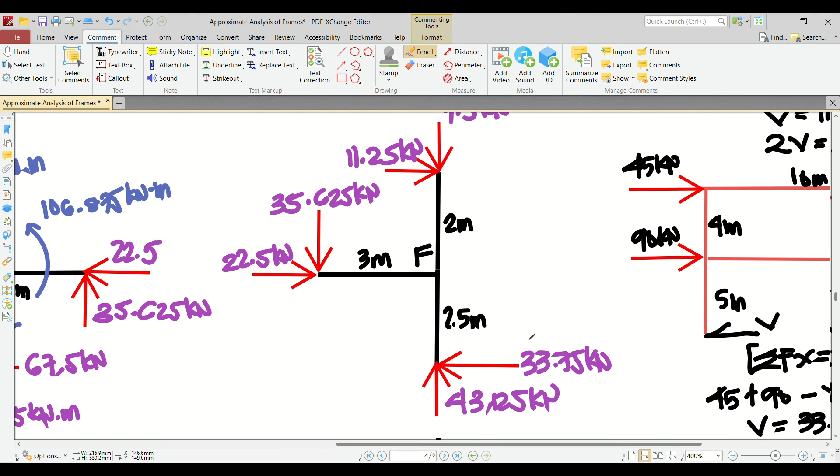Okay, so we can now proceed to the moments. So yung moments natin, pwede natin kopyahin, 22.5 dito. Sa kabila, that's 106.875. Siyempre, so magka-counterin yung dalawa, kulang yung clockwise. So dapat clockwise ito, that is 2.5 times 33.75, so that is 84.375. So dapat kapag pinag-add natin tong dalawa, equal sa 106, so plus 22.5, so okay naman. So equivalent naman sa 0. Most probably, we are correct.

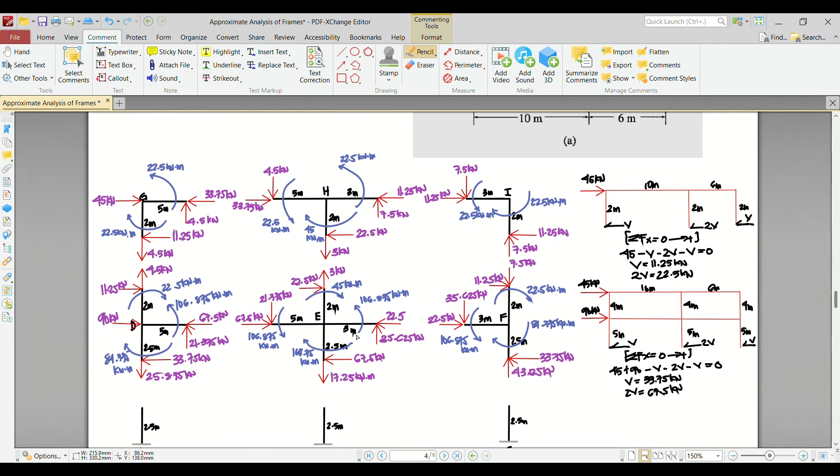So after that, we're almost finished, no? Pwede na nating ibaba yung mga forces. So ibaba na natin, so ito pataas. So this is 33. Ay, sorry.

25.875 kilonewton. And then we do have moment, which is 84.375.

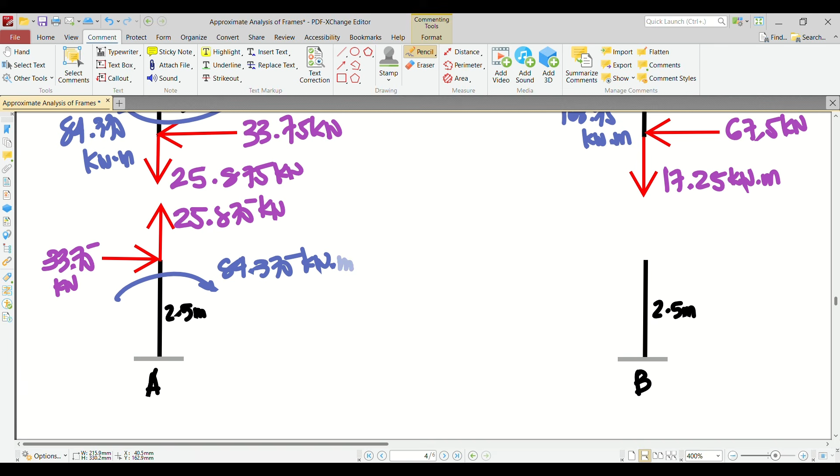So of course we need to counter that out. Counter, this going down. This going to the left. Then counterclockwise, okay, that's good. So this is 33.75, this is 25.875. Let's label them AX, AY.

And then a moment, MA, which is equivalent to 84.375 kilonewton meter. So we can now proceed to the other support.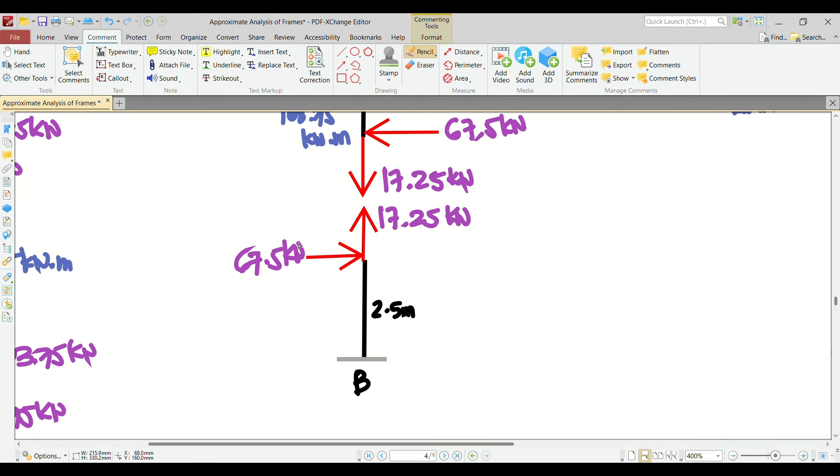So for our other support, upward, down, sorry, we need to add upward, going to the left. The value here is 17.25 kilonewton, sorry, no meter, that's force. So this is 67.5 kilonewton. Then let's incorporate the moment, which is 168.75.

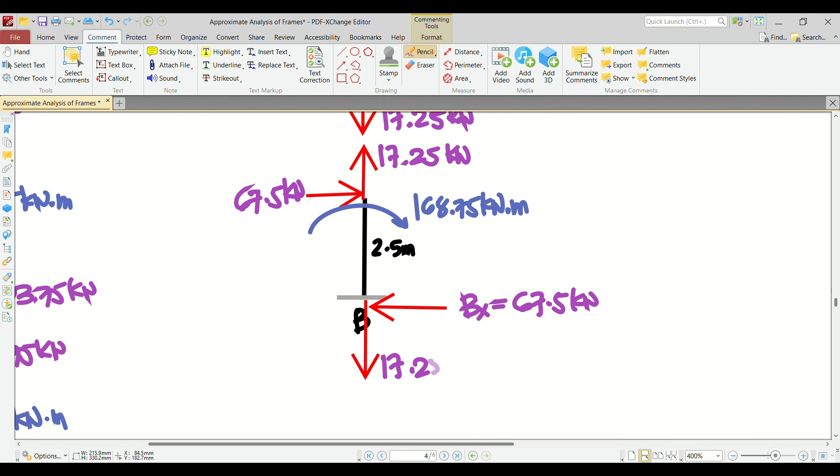Okay, so let's write the reaction, opposite in direction. So we have here 67.5, sorry, BX. Then we have here 17. And then we do have a moment, MB.

And then finally, the last joint. So this one is 43.125 kilonewton. Okay, then we have the right side, 33.

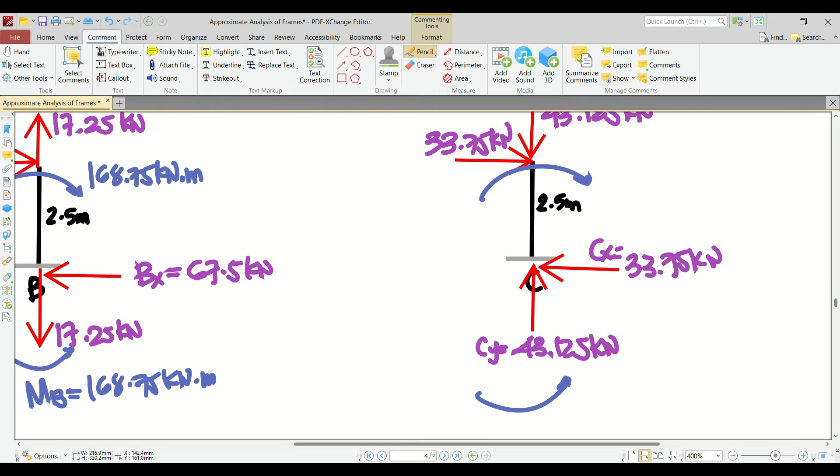Okay, reaction. And then this one is 43.125 kilonewton. This is CX, this is CY. And then we do have the moment. We need the moment here first. So the moment here is 84.375. So that's also our moment here, MC.

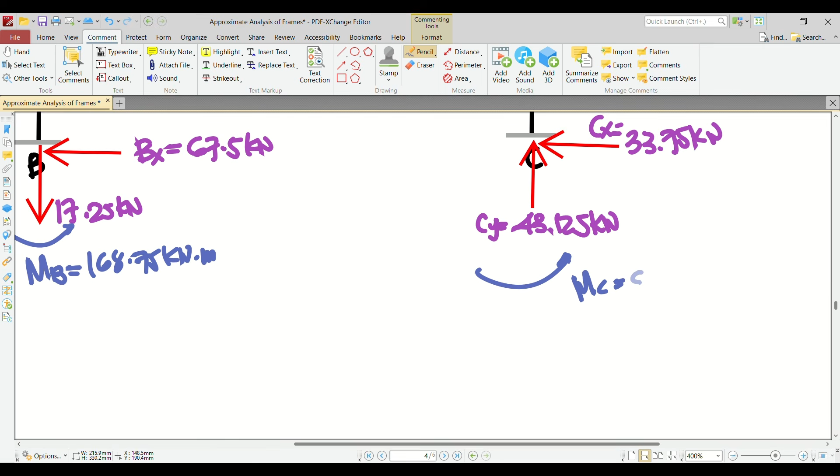So we are now finished, right? But not all of this is what's being asked. What's being asked? Number 1, shear at column EB. So what is the shear at column EB? This is E, this is B. So again, the force perpendicular to member EB is 67.5.

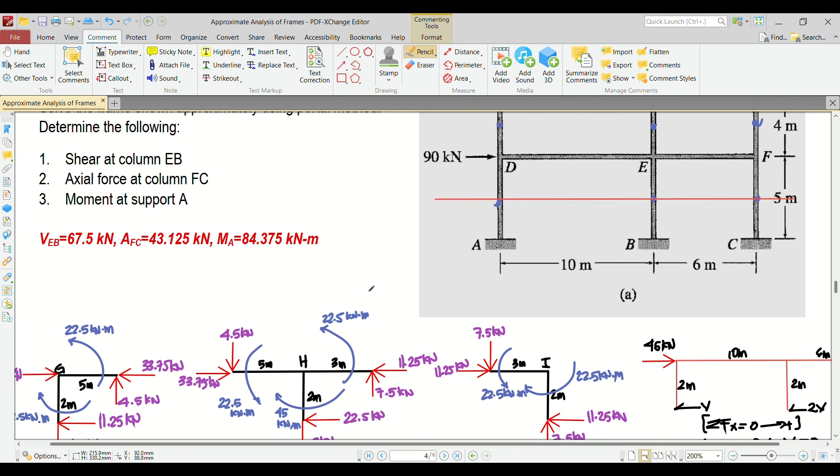Am I correct? So that's right. So our VEB, or number 1, the V for EB, E and B, force perpendicular to that, is 67.5 kilonewton. So that's your answer for number 1.

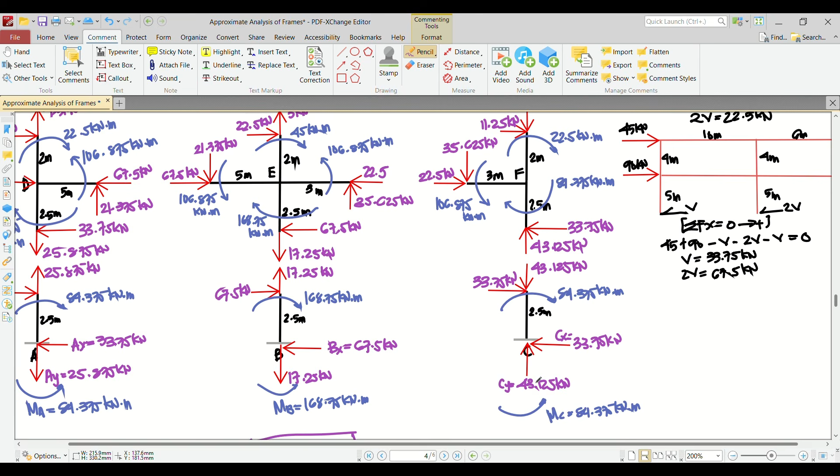For number 2, what's being asked? Axial force at member FC. So this is FC. Axial force is parallel, so that is 43.125. Let's check, that's correct. So axial force FC is equivalent to 43.125 kilonewton. So that's our answer.

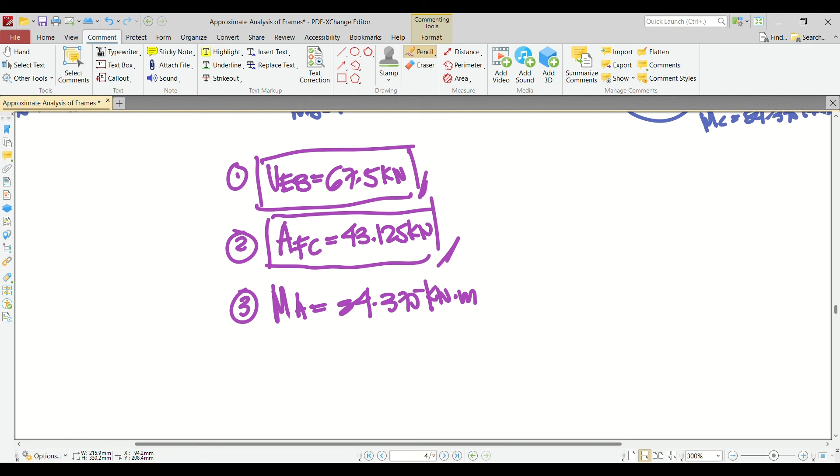And then number 3 asks for moment at support A. So moment at support A, this is point A, our moment is 84.375. That's correct. MA is 84.375 kilonewton meter. So this is already our answer for problem number 4.

Again, you don't need to solve each and every force present in the framing system. I solved it so that whatever is asked of you, you can get it. So let's see if what I said is true, that we don't need to solve all the forces here.

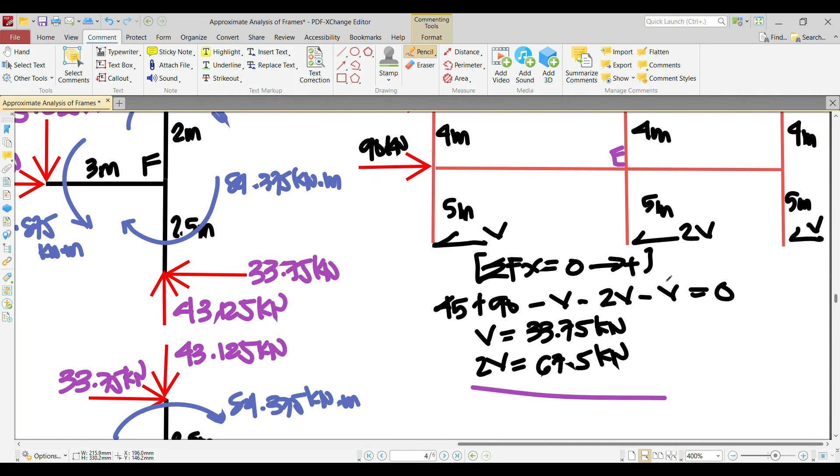So number 1, if you're asked for the shear at EB, this is it, right? Shear at EB, isn't this it already? What we got, 2V, that's it, right? Shear, isn't this point E? Then below is point B. So if we're going to find the force perpendicular to that member, that is 2V, which is equivalent to 67.5. That's correct, right?

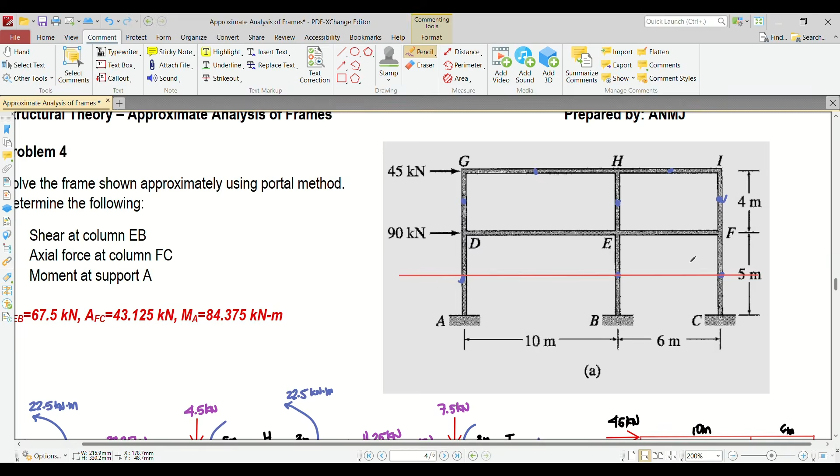67.5. How about the axial force at FC, 43.125? How can we get that? You can begin with this joint. So if you begin here at this joint, using the equilibrium equation, if you have 11.25 here, you should also have 11.25 here. After that, proceed in getting the moments. Once you get the moments, you can go downward, and once you get that, you will also get the value of 43.125. So instead of solving everything, you can go downward. It's up to you.

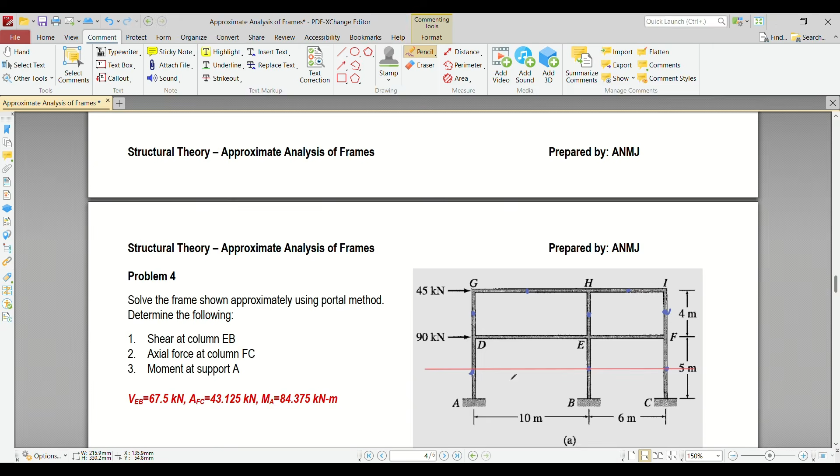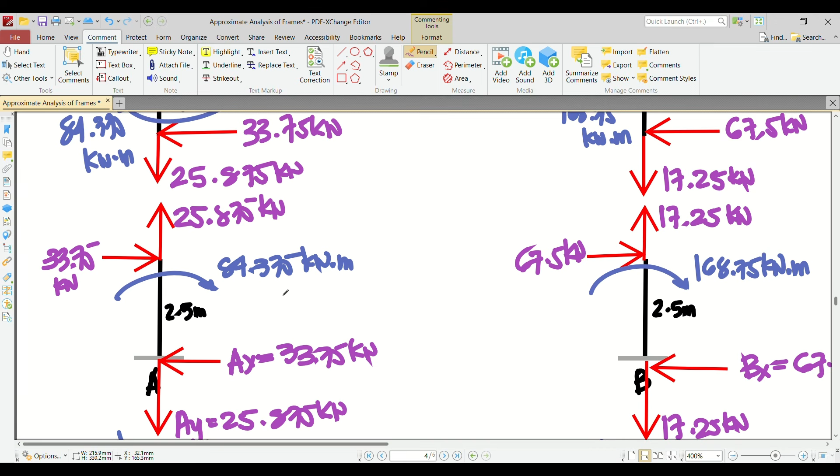So for this one, this is easier. Moment at support A. How do we get the moment at support A? Isn't this also the same? V, as you can see here, is 33.75. Isn't this the same one? 33.75. If we transfer it, it's still the same, 33.75. So now, in order to produce moment, force times distance. This is point A, your force is 33.75, your distance is 2.5. The 25 meanwhile cannot provide moment because there's no perpendicular distance. Only this, the 33.75. So 33.75 times 2.5, you get the value of 84.375.

So the easy ones are this and this. This one is a bit harder, but it's manageable. So that means you don't need to solve everything here. I just solved it so that whatever member is asked about in our framing system, you can solve for it. Okay, so that's how we answer approximate analysis of frames due to lateral loads, the portal method.

So our next topic is the cantilever method. Stay tuned for that.